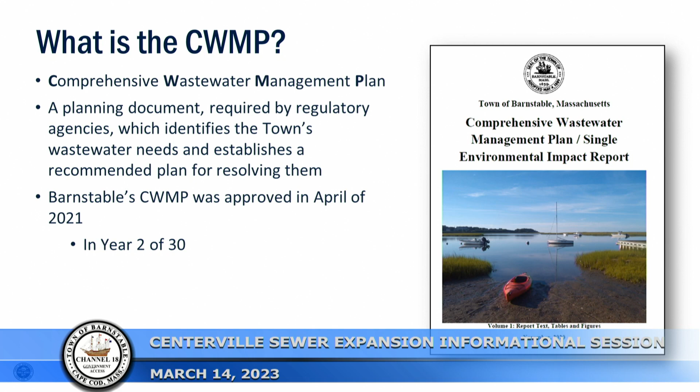What are the general problems that the CWMP is trying to address? Well, the first and largest one is impaired coastal waters, which all of our south-facing embayment systems are impaired by nitrogen. So the key goal here is to try to remove nitrogen from the environment. We'll talk about nitrogen in a minute.

Also, we're trying to address groundwater quality concerns. We sit on top of a sole source aquifer, and that's where we get our drinking water from. So we're trying to find ways to minimize contamination to that important resource.

Pond water quality concern. Everybody is probably aware that we've been seeing decreased water quality in our freshwater ponds in town, including cyanobacteria blooms and other water quality concerns. Many of these actually trace back to wastewater issues as well, so the plan does intend to address some of those concerns.

Flood zones and climate change, making sure that we consider changes in climate and impacts to wastewater infrastructure within those flood zones and areas that will be impacted by climate change.

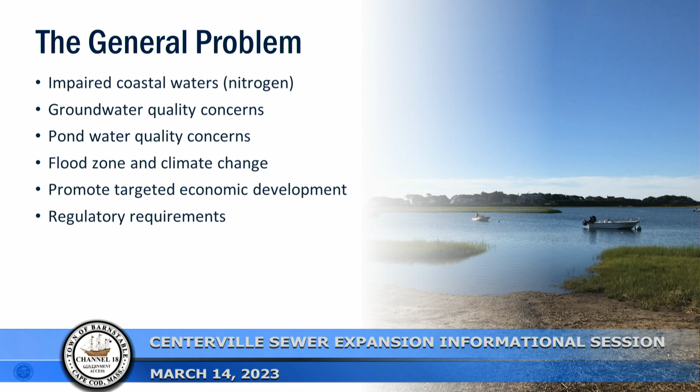And promoting targeted economic development. We worked with our planning staff in the development of the plan to identify locations where Title V is currently restricting growth that may be desired in certain locations—not everywhere, in locations that it makes sense. So that's one of the other goals of the plan.

And then regulatory requirements—the plan is a regulatorily required document.

So just a review of what nitrogen pollution in Barnstable means. Nitrogen pollution has been documented by the Massachusetts Estuary Project, you've probably heard of it, called the MEP. This was a series of reports undertaken by the UMass Dartmouth School of Marine Science and Technology, starting in the 1990s and through the late 2000s.

Really what it did is it studied each coastal embayment system on the Cape, and some of southeastern New England as well. What it found is that Barnstable's coastal waters are impaired by nitrogen. It identified effectively a nitrogen budget for all of these systems, called a total maximum daily load. Under the Clean Water Act, communities are required to achieve these total maximum daily loads and make remediation measures to ensure that we do. That's where the CWMP comes into play.

So this chart here—a little hard to see right now. Where's the laser? There it is. Okay, so you have the big blue pie here on the pie chart. This is showing controllable sources of nitrogen on Cape Cod, from the 208 report done by the Cape Cod Commission in 2015. What it's showing is that about 78% of all the controllable nitrogen that enters the coastal embayments comes from septic systems.

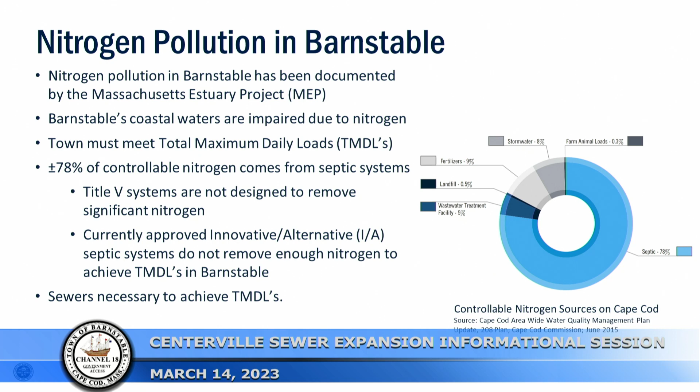So a couple notes on septic systems. Title V septic systems, which is the standard in Massachusetts right now, are really not designed to handle nitrogen. There are innovative alternative septic systems that have been designed to address nitrogen, but the currently approved ones do not remove enough nitrogen to meet TMDLs in Barnstable. As a result, the plan identifies sewer expansion and wastewater treatment as the main way to address the TMDLs in the community.

So what about the do-nothing approach? What's the cost of inaction? Well, the Federal Clean Water Act requires communities to meet the TMDLs, so not doing so could result in an enforcement order, fines, or other negative impacts to the community.

But also, it will result in further damage to the water quality and our important water resources, which inevitably will have a negative impact on the local economy and on property values. Obviously, those are all bad things that we're trying to avoid.

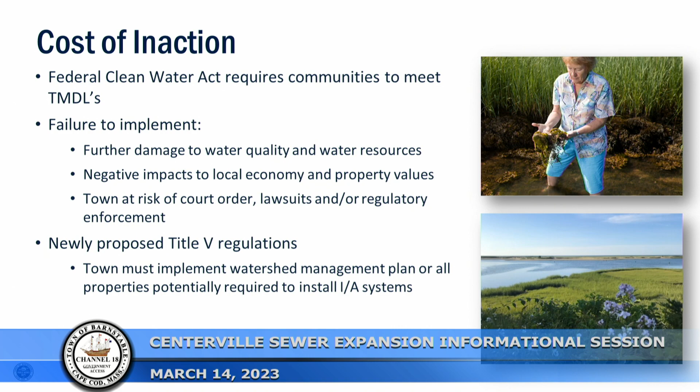In addition, there are newly proposed Title V regulations that some of you may have heard about. Effectively, what that's saying is that if communities don't implement a watershed management plan similar to the comprehensive wastewater management plan, every property located within an impaired watershed will need to install an innovative alternative septic system.

They actually don't even achieve the TMDLs in some of our coastal waterways in Barnstable, so we don't really view that as a good solution. We want to find a solution that addresses the problem in a manner that can be replicated and moved forward.

So what is Barnstable's plan? Barnstable's plan is three 10-year phases of sewer expansion, effectively. About 190 miles of new sewers will be installed in this community through this plan, and a little under 12,000 properties are scheduled to be connected to the sewer system.

Each phase is not one big project. Each phase is broken up into about a dozen or so smaller projects to make them more manageable, so we can coordinate traffic disruption, believe it or not, and make it more easily executed and achievable.

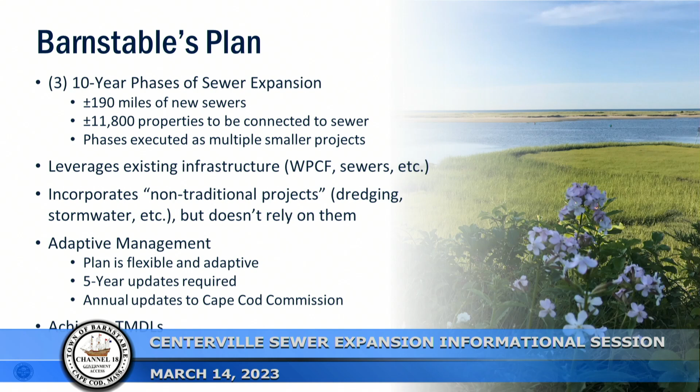It requires adaptive management. The plan has to be flexible, and it has been approved to be flexible. As we worked with regulatory agencies to have the plan permitted, they acknowledged, and we acknowledged, that things are going to change over 30 years. Things have already changed over the first two years.

We have new projects coming in from the outside, new opportunities — such as one we're going to talk about tonight — to expedite certain sections of the sewer system and save money or minimize disruption by sequencing along with a partner, for instance. So it's important that we're able to do that, and our permitting of this plan allows us to.

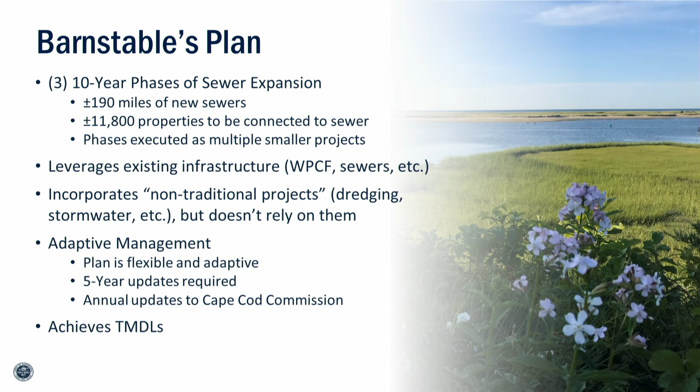We are able to more or less expedite sections of the plan as long as we're achieving the overall goals of the plan. And we are required to provide a five-year update to regulators, which is effectively a look back and a look ahead at what we've accomplished and what we plan to accomplish over the next five years, and any changes.

Each year we have to provide an annual update to the Cape Cod Commission. We've had one so far because we're in year two, and we'll have another coming up in July that we have to submit. You can actually find the annual report on the Barnstable Water Resources website, which documents what we've done to date, what changes we're seeing, and what we're planning moving forward. If you're interested in diving into that, I welcome you to take a look at the website.

This is what the plan looks like. This is what was submitted in November of 2020 and ultimately approved by the regulatory agencies.

So what you have is a bunch of colors over the community. In red are the Phase 1 projects, at 10 years of sewer expansion. In green is Phase 2, 11 to 20 years. Yellow is Phase 3, 21 to 30 years. Then you have some additional colors out in the Cotuit area, which we've called the stages. They don't have a time associated with them yet.

Because at the time the document was being prepared, there were discussions about a potential western solution, and those discussions are still ongoing.

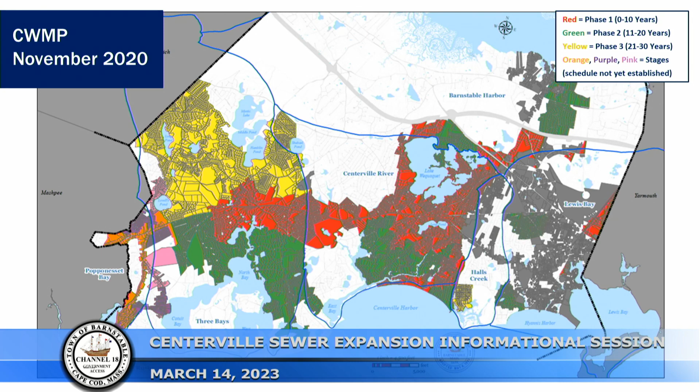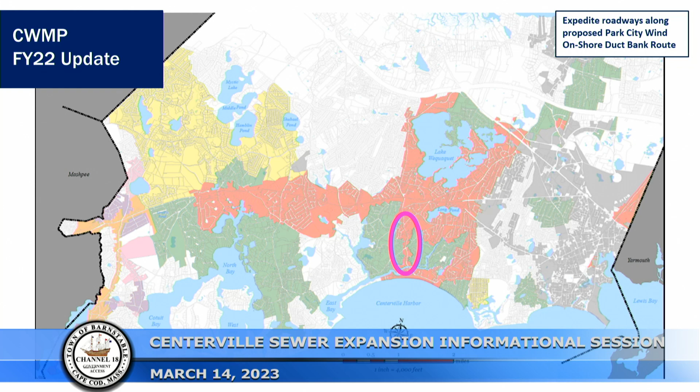So this is the approved plan, and here's a change. It's a little hard to see right now, but this is what you'll see if you look at the annual report to the Cape Cod Commission. There's a circle here, and that's the area we're really focused on tonight, a portion of it anyway. A small portion of the proposed Park City Wind route was originally shown in Phase 2. We'll be expediting it into Phase 1 in order to be able to partner with that project potentially.

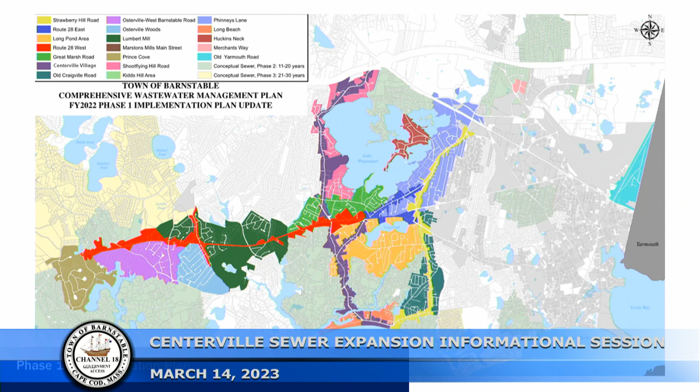What we're really principally going to talk about tonight is this project in purple, the Centerville Village Sewer Expansion, along the Park City Wind route. There are a number of other projects we'll give a quick update on as we continue through Phase 1. We have about 6 to 8 projects currently actively being worked on, in some level of design or implementation and construction. So a lot going on, a lot happening in parallel paths.

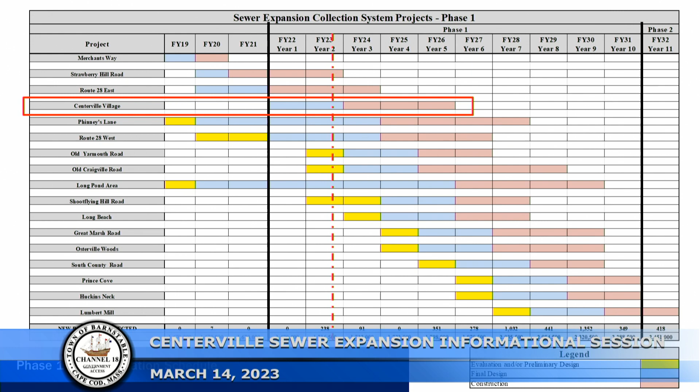This is what it looks like from a schedule perspective. The lighting is kind of killing us here a little bit. There are some blue blocks you're not able to see, but what's important is the red blocks. This vertical line designates where we are today, here in March of 2023. This black line was the beginning of Phase 1, and this side would be year 10, the end of Phase 1.

These are all the various projects that'll be executed during Phase 1. In the red block, we're showing the Centerville Village Sewer Expansion, which is the main one we're going to talk about tonight. Second one down, you see the Strawberry Hill Road project, which was projected to be completed by the end of fiscal year 23, and here we are approaching the end of fiscal year 23, coming to the end of that. So that project is on time, on schedule, and on budget.

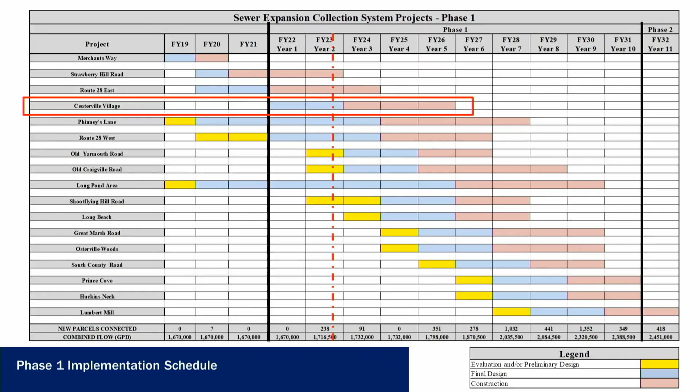There are a number of other projects shown here with various timeframes. You can find this in the annual report as well if you're interested in the schedule of your specific project. We'll go through that a bit more in the next couple of slides.

So the Strawberry Hill Road Sewer Expansion Project, I already alluded to it, but we're winding down on the project at this point. We're, as the graph shows, about 95% complete. In fact, the final stick of gravity sewer pipe went in on March 8th, which was exciting.

We're still working on some of the service laterals that need to be installed along the northerly portion of the project, and then the pump station down at the intersection of Craigville Beach Road and Strawberry Hill Road, scheduled to be completed sometime in April. Then we'll be closing out that construction contract, which will be exciting for all of us over at DPW for sure.

In the fall, we will be coming back to make some adjustments to some of the laterals that were installed in the southern portion of the project. They were designed and installed deep, and for the convenience of residents that live there, we're going to raise them up so they're a little easier to tie into when people hire their contractors to connect. That should help folks save a little money when they come to connect.

So Vineyard Wind construction continues. As you all probably know, this was the project that was coordinated with Vineyard Wind. Their duct bank construction continues.

They're going to be up on Phinney's Lane beginning on the 20th, and they'll be working through Memorial Day on installation of their duct bank in the northerly portion of Phinney's Lane. They will have to pull cable after they install their duct bank. That's probably going to happen in June.

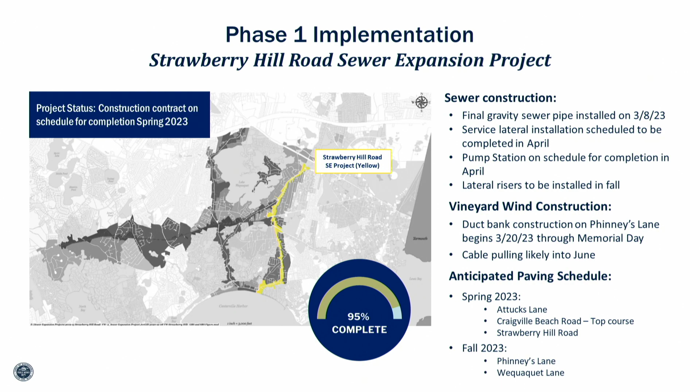So the second project that's currently under construction right now is really two projects from our perspective, but it's really one big project. We manage two construction contracts for it, but it's one big project, and it's called the Route 28 East Sewer Expansion Project.

This is what I call probably the most foundational piece of infrastructure we're going to install as part of the CWMP, other than improvements we make at the wastewater treatment plant.

So what this project is doing right now - and I'm sure you're all very aware of the project - is installing the pump station at the intersection of 28 and Phinney's Lane. That pump station is going to be the piece of infrastructure that will allow for the remainder of the western expansion of sewer that we showed on that map. So everything to the west of that is going to go through that piece of infrastructure moving forward.

In addition, there will be new pipes that come all the way from that piece of property to the wastewater treatment plant, which all that flow will come through. The existing collection system couldn't handle it, so we needed to build a new pipe.

Also as part of the project, and you're seeing this right now, is the southerly portion of Phinney's Lane that's north of 28. So there's digging going on kind of on Phinney's Lane north of that pump station site. That's part of this effort, actually - it's separate from the other construction that's ongoing.

They're going to be continuing that effort till about April. They're going to stop, and they'll be back on Phinney's in the fall, but they're going to be transitioning to Route 28 in April to start some sewer construction effectively from that pump station to about West Main Street.

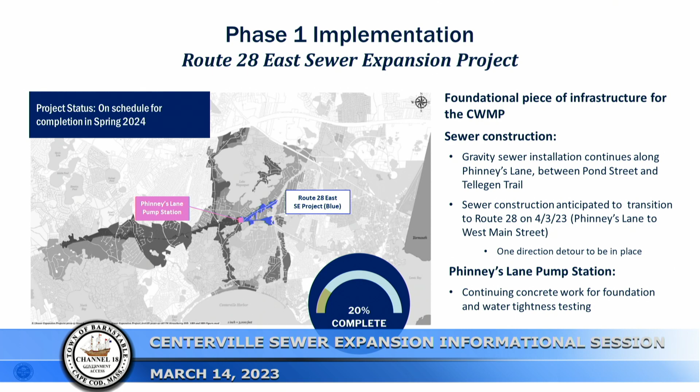And then we will be back in the fall to continue the force mains to the wastewater treatment plant, which will not be as disruptive as the work we're going to be doing here over the next couple of 6 to 8 weeks, as we have to install some gravity sewer in Route 28, which is deeper and more complicated work. But this was all obviously anticipated as part of this program.

There will be a one-direction detour in place, so westbound traffic on 28 will remain on 28. Eastbound traffic will be detoured down West Main Street during the construction hours during this time.

So it will certainly - there will be delays. We're already seeing delays. We will be seeing additional delays on that section of roadway during this time. Fortunately, they'll be starting after or before the beginning of schools, so we won't be delaying kids getting to school too much. But the construction will be going from about 8:30 to 5 on any particular day.

In addition to this project, we talked about the Phinney's Lane pump station. Right now they're continuing to pour the concrete for the foundation, and I got some pictures of that, which you'll see in a second.

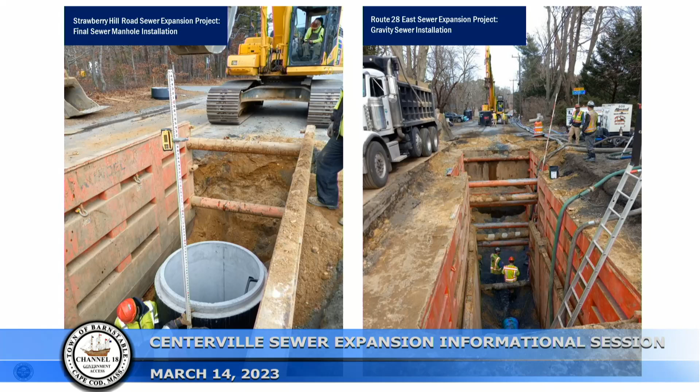So this is some of the sewer construction that has been ongoing. On the left is actually the final manhole being installed as part of the Strawberry Hill Road project. As I was saying, that's coming to an end - that was the last manhole being installed. On the right is the gravity sewer installation happening on the southern portion of Phinney's Lane as part of the Route 28 East project, kind of around near that pump station. You'll see the difference in the two pictures.

The last manhole we put in on Strawberry Hill Road was about 10 feet deep. On the right-hand side, we're about 20-ish feet deep. So that's why you have the roadway closed, and you can see some pipes on the side. We're actually down in groundwater, so we need to pump the hole dry in order to make sure it's a safe environment for the workers, and so we can have some stable bedding to install the pipe and everything.

So some complicated construction ongoing in the community right now.

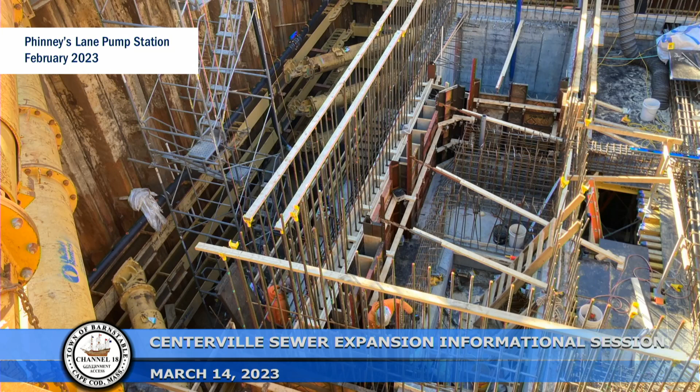This is the pump station, as it looks back in February. So you saw the big crane - there was a reason for it. We dug a big hole, poured a bunch of concrete, built a bunch of rebar. We're coming up with that now over the course of the next month or so. We should be wrapping up the foundation work, which will be great, and then we'll start actually seeing a building going up here over the course of the spring and into the summer. Just wanted to show this picture to show what all the construction over there was all about.

One of the next planning projects we're currently working on is the Route 28 West sewer expansion. So we had the Route 28 East sewer expansion - this is the next section of work in Route 28. Route 28 is really the backbone of the planned system. It allows us to get out west because it's the main roadway right down the center of town. This project will extend sewer from Phinney's Lane all the way to 149. We awarded the design contract late last year - design's ongoing, and we're expecting construction to start in 2025.

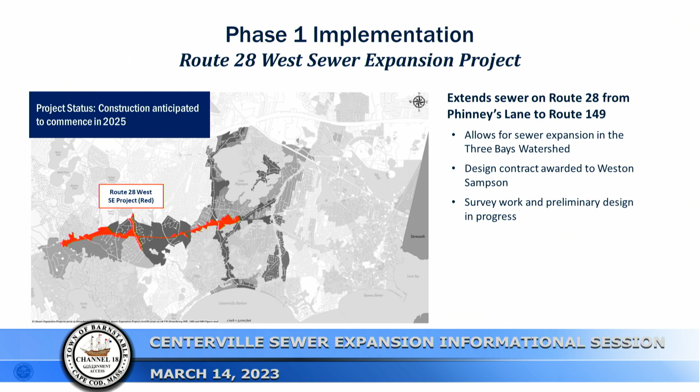The next step after that is a whole number of neighborhood projects. We're doing a lot of the main roads right now, kind of have to do that first, and then we're going to start getting into neighborhoods. The first of which is the Phinney's Lane sewer expansion project, shown in light purple, right in this area - the neighborhoods on either side of Phinney's Lane, north of 28, between 28 and 132. So we'll be extending sewer into those neighborhoods as part of that project. The survey is complete, we've done some internal design, we have a design staff at DPW doing the preliminary design, and we'll be hiring a consultant to finalize the design over the course of the next year, expecting construction to start in 2025.

In orange is the Long Pond area sewer expansion project - this is the area around Long Pond, Centerville. Again, a neighborhood project, getting into all the neighborhoods off of Pine Street and Main Street in that area, South Main Street, and starting to collect flow from the neighborhoods. This is where we start to actually see the nitrogen reduction significantly, because that's where the nitrogen's coming from - your septic systems. When we're putting in infrastructure on the main roads, it's not as dense - there's not as many homes per foot. But once we start getting into neighborhoods, that's where we start collecting more nitrogen and making a significant dip into that. Long Pond area construction is anticipated to start in 2027.

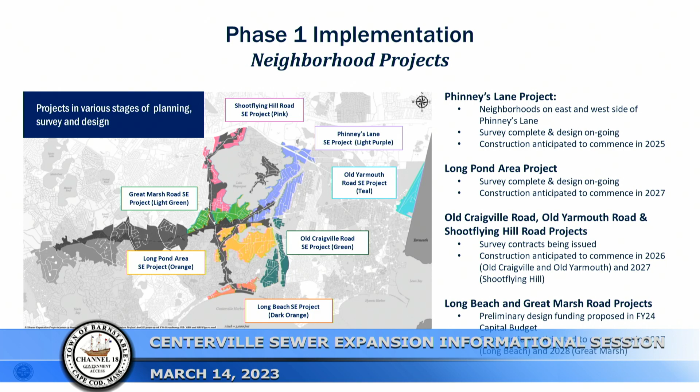Old Craigville Road is down in this area - effectively the neighborhoods on either side of Strawberry Hill Road, from Pine Street to Craigville Beach Road. Old Craigville Road runs diagonally through that, so we chose that name. Similar to the other two projects, neighborhoods down in that area, with construction anticipated to start in 2026. Old Yarmouth Road is the kind of triangle formed by Yarmouth Road, Route 28, and the Yarmouth Town Line.

That's the commercial area with the car dealerships and everything else going on up there. Sewer expansion is expected to start up there after the intersection improvement project stops, so that we're not in conflict with DOT's work that's ongoing there now.

That's principally going to be in the back roads. A little bit will happen on Yarmouth Road, but it's principally going to be back in Old Yarmouth Road and Rosary Lane back there. That's scheduled to start in 2026.

Shootflying Hill Road sewer expansion is the pink neighborhood roads on either side of Shootflying Hill Road. Actually, Shootflying Hill Road will be in the project we're talking about tonight, but the neighborhoods will be what's been called the Shootflying Hill Road project.

That, again, is 2027. Two more projects that are kind of active in-house: the Long Beach sewer expansion project. So Long Beach sewer expansion actually includes quite a bit more than just Long Beach. It includes Short Beach and the Lake Elizabeth area, so that'll be expansion into those areas.

The design funds for that are scheduled to be included in this upcoming year's capital budget, and we expect construction to start in 2027.

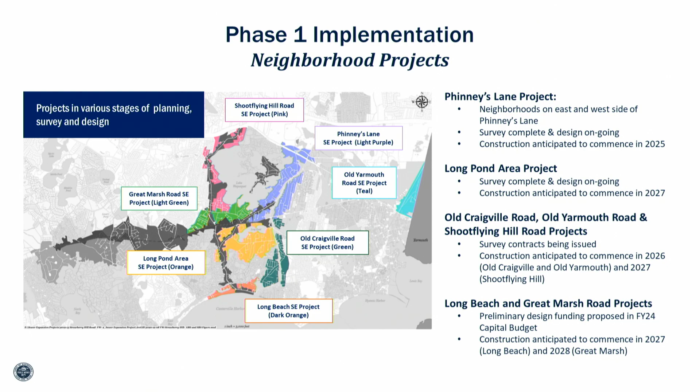Last project before we get into the main project for tonight is the Great Marsh Road sewer expansion project, which is here in green, right there. Again, neighborhoods on either side of Great Marsh Road, scheduled to start in 2028.

So that brings us to the Centerville Village Sewer Expansion Project, which again is really what we're here to talk about tonight. This is the route along the preferred upland duct bank route of the Park City Wind project. It's about 5 miles of new sewers.

We're anticipating about 6 new sewer pump stations are necessary along this route, as it's a 5-mile long route with a number of low points and things along the route. About 350 new properties are along the route that will connect to it once we are completed.

The design is being coordinated with the Park City Wind design. That's out of necessity, as I alluded to earlier. We're operating under the assumption that that project will be happening, and we need to make sure a corridor is maintained for the duct bank to be installed and for us to get a sewer in the ground in these roadways prior to that duct bank going in.

We're anticipating at this time construction to be sequenced with Park City Wind, and we'll talk about what that would look like if that's to happen. Every indication I have at this point is that's what we still will be doing. But obviously, as I talked about earlier, there are some questions up in the air there. I'm not going to get into that too much, but we're planning, forging ahead with the assumption that construction will be happening in conjunction with them.

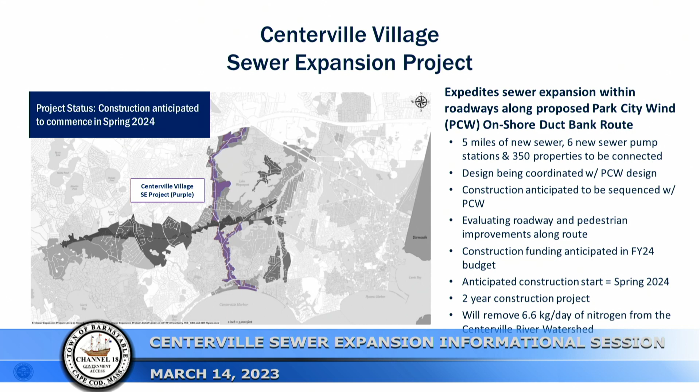So I'm going to review the route just real quick. What I've done is taken the last map and just kind of turned it 90 degrees, so north is on the right side of the figure here. On the left side is Craigville Beach and Craigville Beach Road.

The sewer expansion is actually going to start at Covell's Beach, because as part of the Strawberry Hill project we stopped at Covell's Beach and we need to pick up those pipes and bring them to a pump station that'll be located along Craigville Beach Road. So the sewer expansion will be all of Craigville Beach Road from Covell's Beach to South Main.

It will include Main Street. So this would be the historic Main Street here, and then the spur of Main Street up to Phinney's Lane and North Main Street, with Mother's Park being right in this location. Route 28 would be right about here on this plan.

And again, I'm sorry it's a little dim with the lighting we have here. It's going to take the turn up Old Stage, cross Route 28 there, and then it will take a right onto Shootflying Hill Road and go all the way up Shootflying Hill Road to the service road. That is the Park City Wind route that is proposed at this time.

In addition, there's a little spur right here, at the intersection of Main Street and Old Stage. This would be that stretch of Main Street that turns into Phinney's Lane, Route 28, that goes right past Mother's Park. The reason we need to do that is because this portion can't function without infrastructure being installed on that roadway, because we need to install a sewer pump station in the area of Mother's Park to make that all function. We'll talk about that a little more in a bit, but that's why that spur is part of the project. It's really not part of the Park City Wind project, but it has to be installed for the sewer infrastructure to be effective.

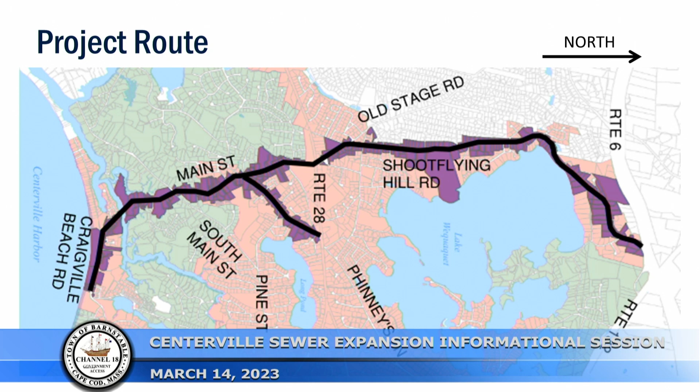So let's talk about some construction impacts for a minute. We're all starting to see what the sewer expansion program looks like, what these construction projects look like, so we'll go over that here. The assumption in this slide is that this is coordinated with Park City Wind too, so there's some discussion about what a duct bank construction would look like.

Both the sewer and duct bank construction are pretty significant infrastructure projects. The sewers require deep excavations, 10 to 15 feet deep, at times down below 20 feet deep, which requires significant trench boxes, big equipment, et cetera. The duct bank construction is significant too. They're installing pretty wide duct banks, a lot of concrete, a lot of pipe. They're a little shallower, but they're complicated construction.

They also have to install vaults along their route about every 1,500 feet or so. Vaults are massive, about 9 feet wide and 30 feet long, about 9 feet deep. They bring a crane in to place the vault, and you may or may not have seen that along the Vineyard Wind route. That's similar to what would need to happen along the Park City Wind route, strategically placed every 1,500 linear feet, but part of the project.

With the multiple efforts comes multiple contractors that have to be coordinated, including coordinated road closures. This construction is really not safe for cars to be driving by, it's deep, it's wide, there's a lot of equipment. We really need to lock down the work zone to make sure the public's safe. That requires coordinated road closures including police details, and when there's not enough police details, we supplement them with certified flaggers for roadway flagging, plus signage and press releases to try to make sure everybody's aware of what detour is being used at that time.

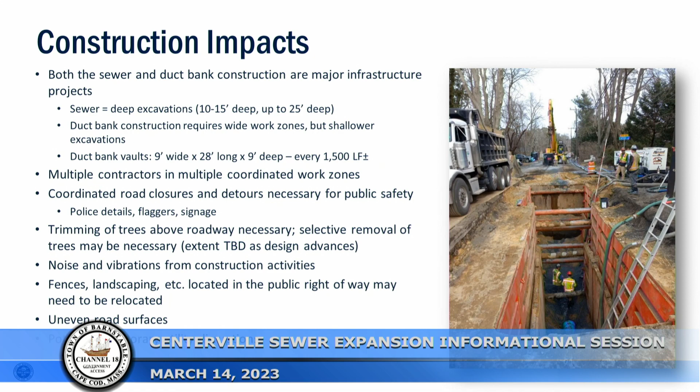With construction comes noise and vibrations, and we look to manage those to the extent possible. Fences and landscaping located within the public way do need to be relocated at times, so we come out and mark the public way, and then have those conversations with residents if we need to. And obviously, while we're in the temporary paving time frame before final restoration, you'll see some uneven roads.

It doesn't really happen all that often, or hasn't, knock on wood, but there's a potential for temporary utility disruptions, particularly water or gas, if a utility's hit during the excavation, or if a utility needs to be relocated.

So how are some of these impacts mitigated? Our regular work hours are 7 a.m. to 3:30 p.m. That's not just for the sewer project, that's really any construction project within the roadways in the town of Barnstable. We do authorize extended hours when it's advantageous, so if it's going to allow for some additional work to happen or work to happen quicker, we'll take that under advisement and make that call.

No work is allowed between Memorial Day and Labor Day. However, similar to the extended hours, we do consider that at certain times. If we're two weeks worth of work away and then we don't need to come back to an area, we're probably just going to try to wrap things up rather than come back in the fall and start disrupting everybody in that area again. So it's a case-by-case basis, but the starting point is Memorial Day to Labor Day, we try to stay out of the roadways.

We strive to have close project coordination with the wind developer. We coordinate our schedules, lay down areas, work zones, trucking routes, detours, everything. Constantly talking with them and their contractors in order to make sure that we both know where everybody is and we can coordinate things to minimize disruption and expedite work.

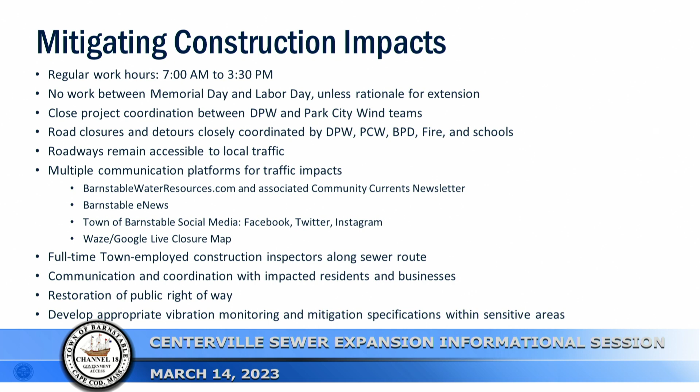We have full-time town-employed construction inspectors along the sewer route. At each of the holes that we have open during the sewer construction project, we have one of our inspectors there so that we can talk to the residents that are near the hole and help them navigate any issues that they may have. Hey, I need to get out of my house and get to work, and you happen to be in front of my driveway. Okay, let's try to find a way to make that work, right?

Or, hey, I'm going to be back from work at 3 o'clock today, and then I'm going to need to head back out. Can we... Got it. We'll make sure we're waiting for you, and we have a way to get you in and out to the extent possible. Sometimes it's not practical to do that, but to the extent we can, we try to make those accommodations.

And then restoration of the public right-of-way at the end. We have a new road at the end of the project, which is nice. And with this particular project, we are going to be developing some detailed vibration monitoring and mitigation specifications within sensitive areas, really the historic district and any areas where there's some older homes that we might be concerned about impacts of vibration or anything like that. So we are working on that, and we'll continue to implement best measures to address that concern.

So coordinating and sequencing construction with Park City Wind. I'll go through this pretty quick, but I want to address maybe some misnomers with the previous project, which was the Strawberry Hill and Vineyard Wind project, and that's that all the utilities go in the ground at the same time. That's not what happens, and they don't go in the same hole. They're being installed in different utility corridors, so a trench here, and that's being done for a number of reasons.

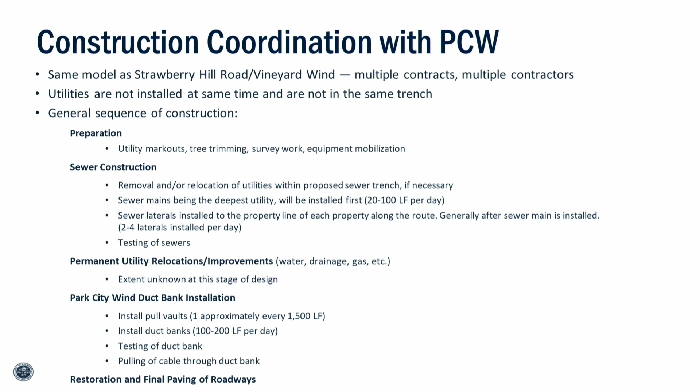After that point, at least on the Vineyard Wind project, and the way we would expect the Centerville project in coordination with Park City Wind would be, any utility relocations that need to happen would then occur, and they would most likely be done by the wind developer. So once we're done with the sewer construction, we'll be on to the next portion of the work, and the wind developer would come in that particular case, start the utility relocations, and then start their duct bank work. The duct bank work would be in a separate utility corridor installed.

Then they have to test the duct bank and pull the cable. Once all that occurs, we repave the roads and we're done. That happens over a sequence of months. We try to coordinate them as close as possible so they occur within the same construction window, or two simultaneous construction windows, to mitigate the amount of time we're in front of any particular property.

The first step is preparation: utility mark out, tree trimming. This is an example of tree trimming along the Strawberry Hill project, where the sewer construction was going to happen. Some limbs were a little too low to get the equipment in, so we had to trim the trees above where that work was going to happen, not horizontally, but above.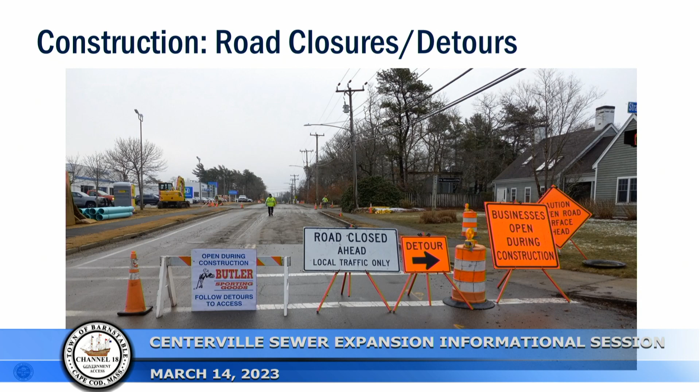Sewer excavation - this is what it looks like. We're digging a hole in the roadway, putting a trench box in, and laying pipe in the hole. That's a simple way to look at it, but you see big equipment and a mess during construction. Well, that's what it looks like.

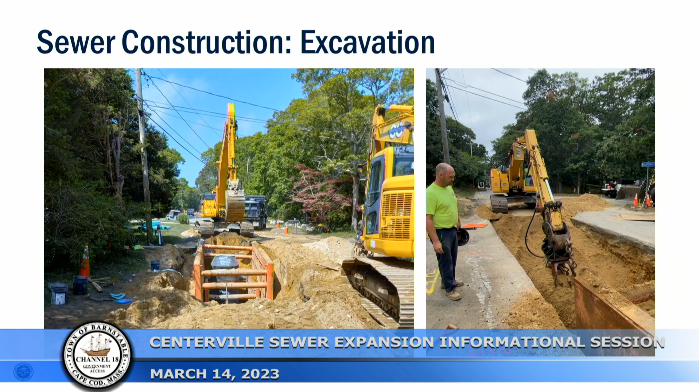Then at the end of the day, on the right side of the screen, we're backfilling the trench, so you start to see the roadway get a little cleaner as the work day winds down. We temporarily pave at the end of the week - we leave it with stone until Friday, and pave once a week all the trenches installed that particular day. So on the right side is what you see at the end of each week.

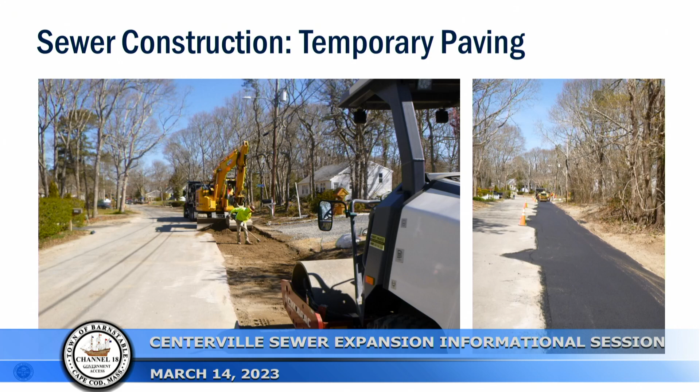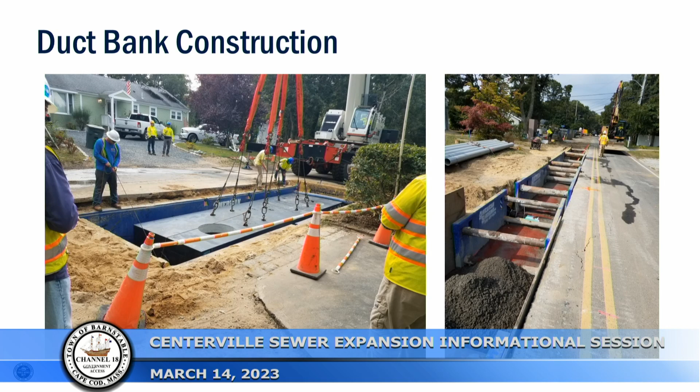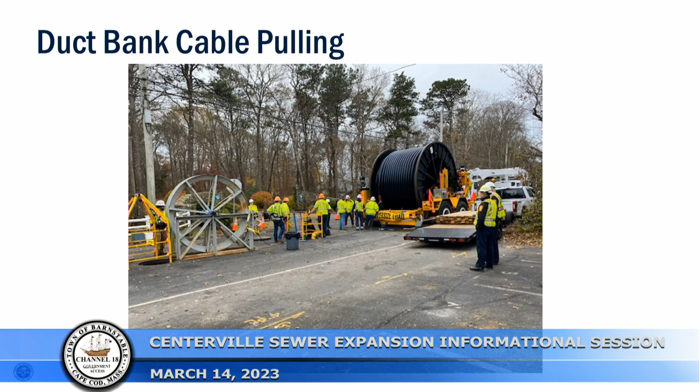Duct bank construction looks like this. The vaults I was referring to are these here - you see a crane set up on the roadway to install this large vault into the excavation. This on the right is what a duct bank looks like: a series of pipes that they pull the cables through, encased in concrete, with trench boxes supporting the excavation during construction. Then they come in with large cable reels and pull the cables through the duct banks, and at the end of the day you have a final paved road.

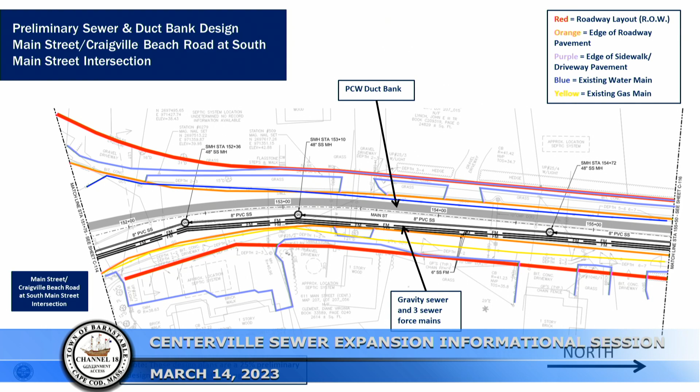Another section of the roadway here near the Centerville Recreation Building. Again, in red is the edge of the roadway, and orange is the edge of pavement. Sewer would be on the northbound side, within the northbound lane. The duct bank would be on the southbound lane.

In this case, the water is a little bit further separated, which may result in being able to retain that water main. However, there are some discussions about the fact that the water main is old and may need to be upgraded anyway. Those conversations are ongoing and there hasn't been a decision made. I know COMM Water is having conversations with the wind developer about that issue.

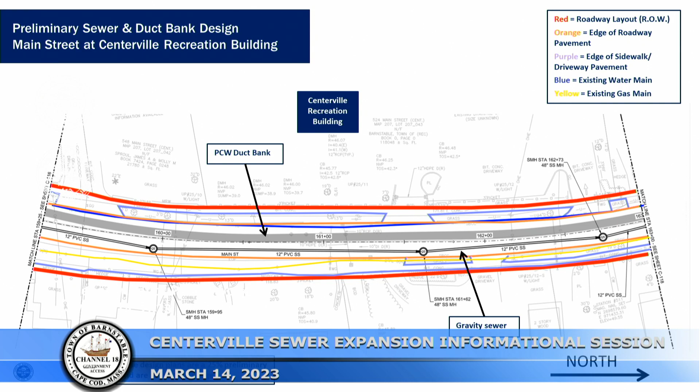All right, so going to quickly go through the anticipated sewer pump station locations along the route, and then we'll have an update on Mother's Park, which is one of the six sewer pump stations along the route. I've listed the locations of the proposed sewer pump stations, and you can see them graphically on the left side of the screen approximately.

So we have one proposed at Craigville Beach in the parking lot. We have one proposed within the town right of way just north of the Centerville River Bridge, and I'll show a picture of where that is. We have one that's going to be necessary along Old Stage Road at a low point.

We do not have the location identified yet, as there's no town property in the location, so we're in the process of trying to figure out where we're going to site that infrastructure. If we're not able to site it, folks may need to have grinder pumps in that area, so we're trying to avoid that. The fourth pump station would be the one in the area of Mother's Park.

There's a fifth pump station along Shootflying Hill Road. Same deal as number three, we're in the process of trying to figure out where that's going to go. We're still vetting that. And then pump station six serves the northerly portion of the project. There's a town-owned piece of property at 467 Shootflying Hill Road that we're looking to site that piece of infrastructure on.

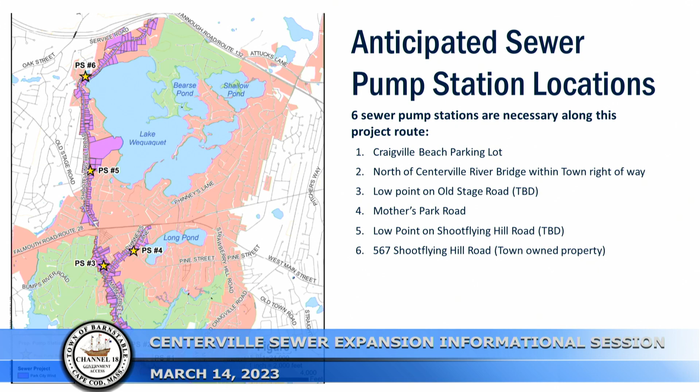Quick reminder of how a sewer system works before we start talking about pump stations. So we try to leverage gravity sewer when we install sewer collection systems to the extent possible. So here's you at your house. Your plumbing drains out, and right now it goes to a septic system, right? It will be intercepted and installed to connect to this public sewer main that'll be installed under the roadway, which I just showed in the other pictures.

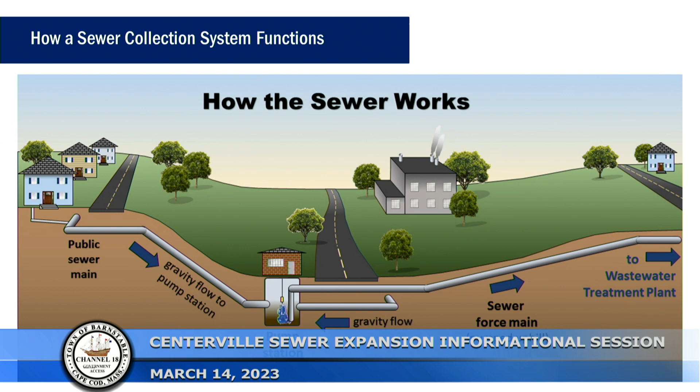Those all have slope to them, and they slope to a low point where we collect the sewage flowing through them into what's called a pump station. That is basically an underground tank where all this wastewater collects, with pumps that then take the wastewater and pump it through what's called a sewer force main, which is effectively just a pipe under pressure, to the point at which we're looking to pump it. Many times it's a wastewater treatment plant, and other times it can be other portions of the sewer collection system that go to another pump station, and we have a daisy chain of pump stations before we get there.

So just a quick reminder as to what that is and how we operate pump stations. When we have a pump station, we are required to visit it once a day. That looks like basically a pickup truck coming to the facility and doing a visual inspection of the key infrastructure. It's required by DEP, and it's good practice to make sure the infrastructure is working well.

We also have all the stations remotely monitored, so our operators at the wastewater plant, if something goes wrong or there's an alarm, will get a text message, and then they'll send somebody out to go maintain the station. Periodic maintenance does occur if something's at the end of its useful life or failing, but that's not very frequent.

Generators are installed at most of these stations. They are exercised once a week for 15 minutes, so you do hear the generator run. That's similar to what you would have with a generator at your house. You want to keep them working well and make sure they're being operated, because that's the best way to maintain them.

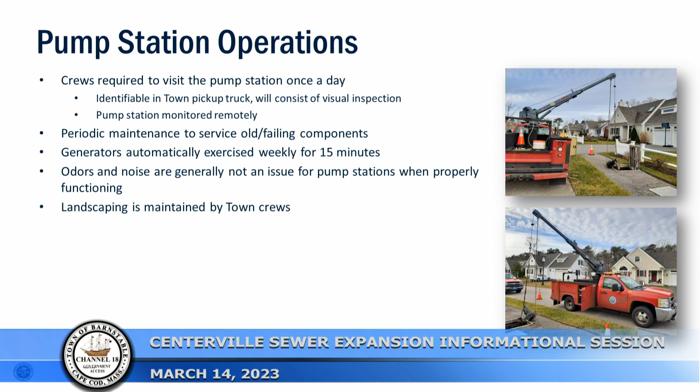Odors and noise are generally not an issue for pump stations when they're functioning properly. If we start smelling them, there's something wrong and we have to fix it. Generally the sewage is contained below grade, so you don't notice it unless something goes wrong, which fortunately doesn't happen often with this type of infrastructure. Landscaping at these sites is maintained by town crews.

So then we're getting into the actual pump station sites. I talked about Craigville Beach earlier, about the fact that we need to connect the pipe that we left for the Strawberry Hill Road project near Covell's Beach to a low point. That low point's going to be Craigville Beach, or the area of Craigville Beach.

We're proposing it to be at the Craigville Beach parking lot. There's a star shown right here in the northerly portion of the parking lot. That would be a submersible pump station, which is a below-grade pump station where the wastewater would come in and the pumps would be.

We also show this square next to the existing bathhouse. The reason for that is the electrical infrastructure has to be above the flood elevation for climate resiliency, and regulatorily we're required to put that infrastructure above a flood elevation, because if it floods, it fails. There's no point in having a sewer system at that point, right?

So on the next sheet I'll show you what the concept is for that structure. We're trying to leverage the bathhouse to make it less visually impactful, but we can't put it on the bathhouse because the bathhouse actually isn't designed to withstand a flood either.

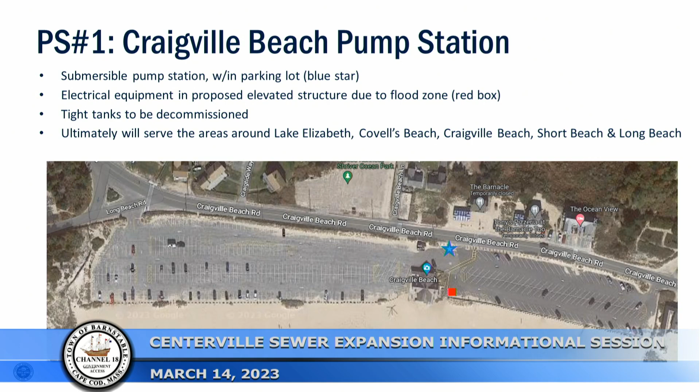So this is our concept for what that could look like. What we have here is, if you're sitting on the beach looking at the bathhouse -- this is the existing bathhouse, and on the right side, one concept is the idea of a clock tower.

This would be a structure where the bottom, in a flooding event, would basically have breakaway panels, and you would just have a structure that remains during a flooding event. Above it would be an enclosed structure that would have all the electrical equipment in it and would be able to survive a flooding event. It would be designed for climate change.

It's required to be 3 feet above the flood elevation. In this area, that's about 15 feet off the ground. Believe it or not.

Ultimately, the top of a proposed structure there would be roughly the top of the existing bathhouse as far as the ridge. It's relatively small in footprint, about 10 by 10. So not a huge structure, but certainly would be noticeable in the area.

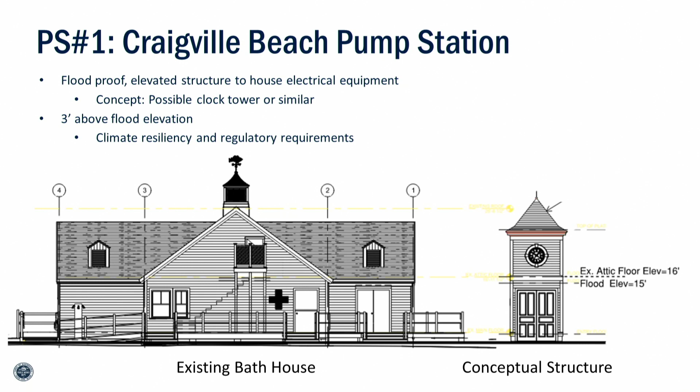Would certainly be interested in ideas or feedback on the idea of a clock tower. That was just an idea that we came up with, trying to make something useful, as opposed to just a structure next to the bathhouse where everyone's saying, what the heck is that thing doing there? So we tried to find a reason to make it useful. Some other ideas we've had are a lighthouse or something like that. But at the end of the day, we were trying to avoid just a big ugly steel structure with a bunch of electrical equipment on it.

Wanted to go through that. Second site, as I alluded to, is just north of the Centerville River Bridge. On the right side, you can see a little star right there. Here's the Centerville River Bridge.

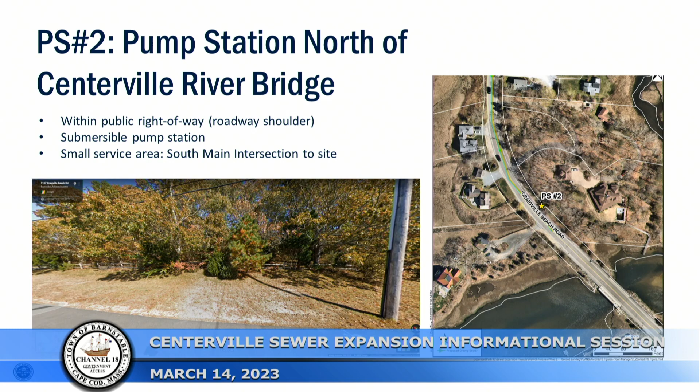There's a big open area of the town, public-owned right-of-way, that is a cleared shoulder here. So we would propose to install a sewer pump station there. It serves a very small area, really just from the South Main intersection south to here, so only a couple dozen homes would be served by it. But we try to install a municipal solution as opposed to requiring all those homes to have a grinder pump on them.

So in this case we were able to do that, and that's one location we're looking to install this infrastructure. I talked about the northerlymost pump station, which was 567 Shootflying Hill Road. Again, that's a town-owned piece of infrastructure, town-owned parcel. Just to orient you, the Lake Wequaquet boat ramp would be 1,000 to 1,500 feet north of here.

In the back of this property is a wetland, so we have to be smart about how we design this piece of infrastructure, because we need to try, to the extent possible, to minimize wetland impacts and stay out of buffer zones to wetlands, et cetera. So we're in the process of designing this station.

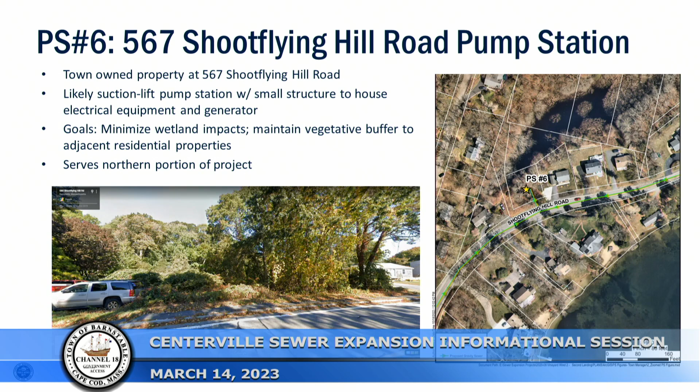We expect it to be a small structure so that we can house some of the equipment within it, and really try to blend it into the residential area, probably have it look like an adjacent residential property rather than just a big cleared area. The goal is to minimize the wetland impact and maintain a vegetation buffer to the adjacent residential areas. It serves the whole northerly portion of that map we talked about earlier, so it's an important piece of infrastructure we have to install.

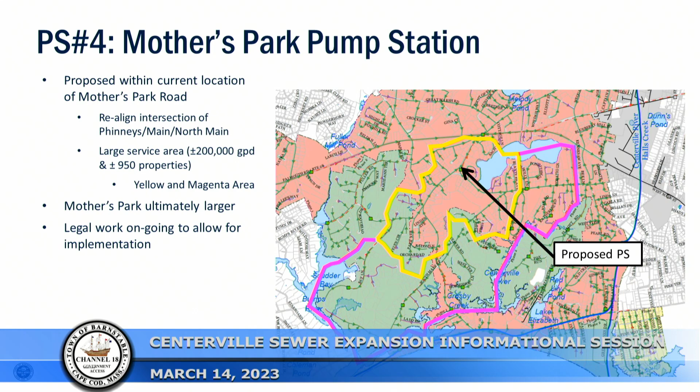It's going to serve about 200,000 gallons per day, about 950 properties. It's an important piece of infrastructure for the build out of this area. It's currently proposed within the current location of Mothers Park Road, which I'll show on a map in a second, and it would require the realignment of the intersection of Phinney's at North Main in order to get rid of Mothers Park Road. Mothers Park at the end of the day would ultimately be larger, which is a great outcome, and we're continuing with the legal work associated with allowing this effort to happen.

So this is Mothers Park, we're all pretty familiar with it. On the right side of the screen is Mothers Park Road, the narrow cut-through roadway that at times can be pretty dangerous if people are speeding and flying right through there without a care in the world. Really the reason why that's there is because the intersection of North Main and Main is pretty poor geometry, at a 45-degree angle. It's not how you design an intersection; you want a 90-degree intersection. So in order to remove Mothers Park Road, we're going to need to realign this intersection down here.

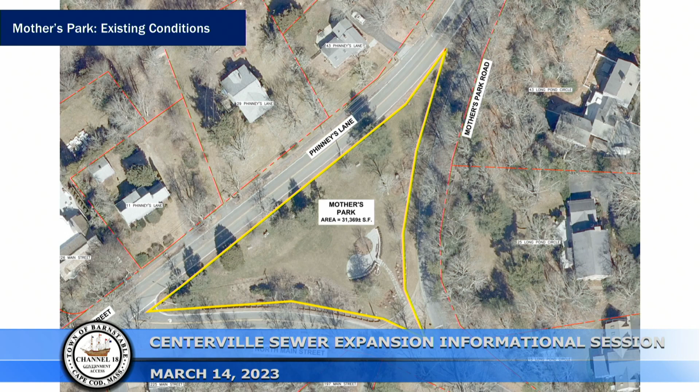So what does that look like? This is what it looks like. The old intersection would be here; it would be in this location at the end of the project. In addition, we would install a crosswalk with a new sidewalk that makes this connection. Along North Main, there's a sidewalk on the south side, so we have a full connection from Main Street to North Main, allowing people to utilize Mothers Park a little more.

In addition, there's really no parking there, and no ADA parking, which is important. So we're going to add an ADA accessible parking space and a gravel parking area so people can actually park there. And this portion of what formerly was Mothers Park Road will become part of Mothers Park. We'll take out the pavement and landscape it however the community desires, to the extent reasonable, and that will be a larger park at the end of the day. When you do the math of the two areas that have to be removed for the intersection and what gets added, it's about 3,500 square feet larger at the end of the day.

So it's a slightly larger site. Why are we talking about it during a sewer project? Well, here's the pump station that would be installed in what was formerly Mothers Park Road. We would leave just a driveway access to that station. This property, 43 Long Pond Circle, has a driveway off Mothers Park, so we'd leave access to their driveway as part of that, but it wouldn't be a through road anymore at the end of the day. It would be signed as such. So a sewer infrastructure improvement, but also really a traffic improvement and a safety improvement to those roadways. Good little project that takes advantage of a couple of issues that need to be addressed.

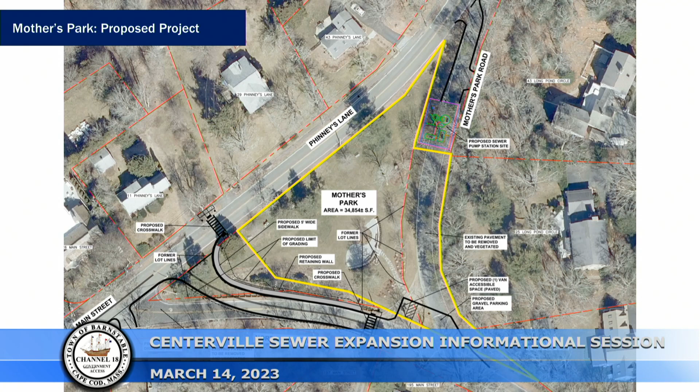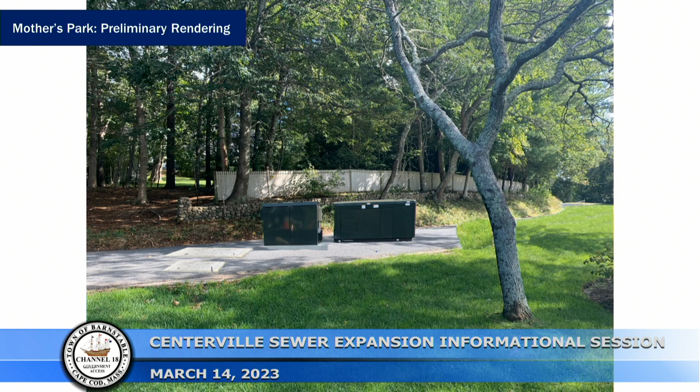So what will the pump station look like? This is the area that the pump station would go in. It would roughly look like this. These are the hatches, and these are what the electrical panels and the generator roughly will look like. In many of these cases, we put fences around them, so we likely will put a fence around it in this location. Just wanted to show what a preliminary rendering would look like.

Driving down Phinney's Lane, heading towards Main Street, this is what you see on the left side here, and this is what you would see afterwards if there was nothing else done. There's the option of putting some landscaping in Mothers Park to kind of screen that and dress it up a little bit, or we could do a fence or something like that. That's something we'll have conversations about down the line, but really what the concept is here for this project.

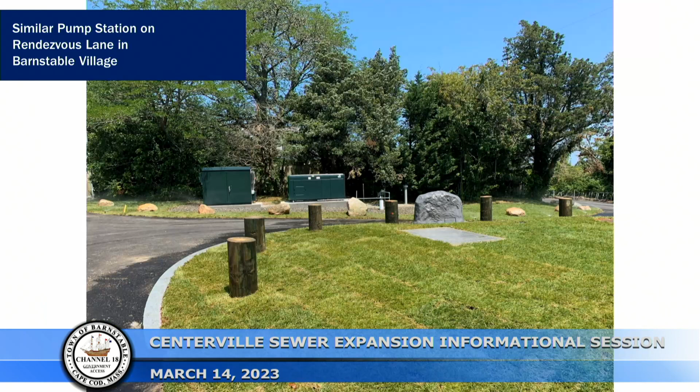This is a similar project we did up in Barnstable Village on Rendezvous Lane. There was a pump station at the end of Rendezvous Lane that anytime we had a nor'easter would literally get flooded with water, and we would wrap saran wrap around it to try to keep it watertight. It was ridiculous. So we decided to move it up and away from the water, 3 feet above the flood elevation to account for climate change. But that required putting the pump station in the middle of, if you've been down Rendezvous Lane, there's a little nice island there. We had some conversations with the neighborhood — I actually held that neighborhood meeting in somebody's garage and talked about what that was going to look like.

We landed on the electrical equipment being sited in this location. We ultimately put a fence around it, which isn't shown here — a nice stockade fence around that now. And just outside of the screen is a landscaped area we came in with our structures and grounds department to dress up the island at the end of the day. That's really what we're looking to do at Mothers Park, similar — you really don't see the infrastructure when you drive by. It's really just a hatch in the middle of the island at the end of the day.

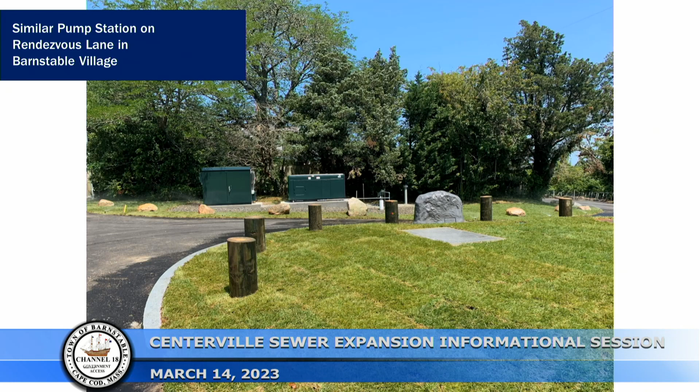So progress to date on this: like I said early on, we had a conversation with the village back in December of 2021 about this project. Since then, we've continued to design and refine the concept design. If you remember back in December of 2021, it looked a little different than what I just showed you, but same general concept.

Mothers Park Road was technically a county road, so we needed the county to make a vote to rescind their rights to the road. They have since done that, and it's now a town road. We'll need to have some action through the town council to discontinue the roadway in order to actually use it for the uses we're going to use.

Mothers Park, however, is protected Article 97 property, as it's a dedicated park. So that requires going to a petition to the legislature in order to change the use of the portion we're going to utilize for realigning that intersection. That's something that will be happening over the next couple of months — at least the application will be happening over the next couple of months.

In addition, we do need to go to probate court because the piece of land was left in a will that's over 100 years old, and it needs to be modified. We have to go to probate court in order for them to allow for that to happen.

So these are actions that are ongoing. When I refer to legal actions that need to happen, this is what I'm talking about. They're ongoing, legal teams on this, and all these items need to happen before we can start construction. And until that happens and construction is underway and coming close to the end, the recommendation we've received is to hold on to 310 Main Street, so that if there's any appeal or anything like that, we're able to have a backup plan, which hopefully we don't have to utilize.

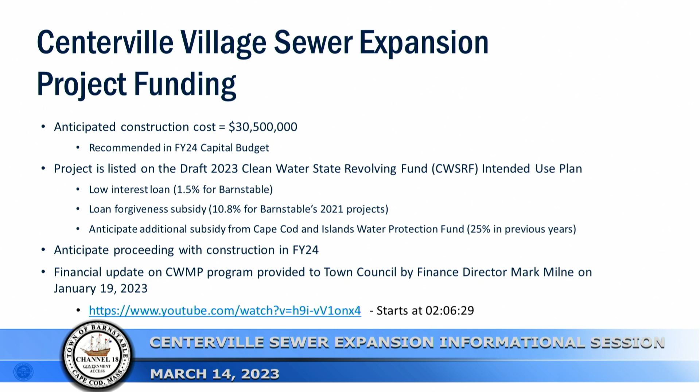And then in addition, on Cape Cod we have the Cape Cod and Islands Water Protection Fund, which issues subsidies to communities that have projects on this list. That's how they've decided to issue these subsidies. Again, in 2021 they issued 25% subsidies to projects. With this project, that would be huge. I'm not sure they'll have that amount of money in the upcoming year, but we anticipate a subsidy through that fund as well.

So there are a number of funding sources that will offset some of the cost of this, but not all. It is anticipated to proceed with construction in fiscal year 24.

One thing I'll note: Finance Director Mark Milne provided an update on the financial plan for the whole comprehensive wastewater management plan, not just this project, on January 19th to the town council. I've provided the link there—you can go on the town's website and navigate to that meeting. It provides good information as to the financial status of the program and what will need to happen moving forward to keep the program viable. Important to understand that. I'm not going to get in the weeds of it because I'm an engineer, but just wanted to point everybody in the direction to get that information.

And then what's the anticipated schedule? The votes for capital projects typically happen in the April timeframe in Barnstable, so we expect the vote from the town council to authorize construction funds around that time. A deadline for us is to have the design to about the 90% stage for submission of our loan commitment application to the SRF program in October. That's a hard deadline we have to hit—that's with every project, frankly.

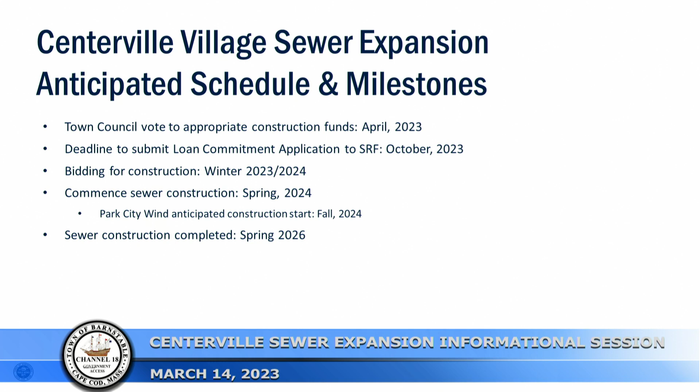All right, so project contacts. As you all know me at this point, I'm Griffin Bowden, the town engineer. There's my information—my cards are over there on either side at the sign-in sheets. We did have sign-in sheets, I didn't mention that at the beginning. If you're interested in getting emails of project updates, please add your name to the list. We'll develop a project list.

We are going to open a public comment period on anything you heard about today. In addition, this public comment period will run through the meeting we have scheduled on April 4th about the Main Street corridor improvements. So that's going to be open through April 30th, and you can email Kelly and submit that public comment—her email's there, and her cards are on either side as well.

And we'll have a website set up that you can review project materials as we continue with the design of this project. So with that, now it's your turn to talk.

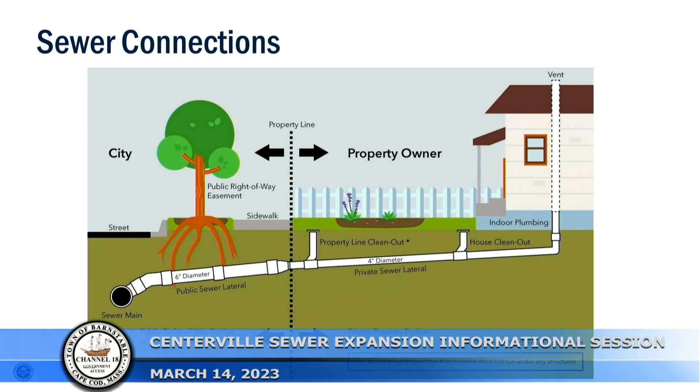As for whether we'll help find contractors, we have a list of approved contractors for this type of work on the website. There are about 30 on it, the last time I checked. That's the list you can work from. The cost varies depending on your property. If you're further from the road, down a hill, and might need a pump, that costs more than if you're about 20 to 30 feet from the road. The pipe comes out where your septic system is located in front, so you may only have about 20 feet to go with the pipe. It can vary, and I'm not going to throw out numbers, but it's in the thousands.

Greg Valenti, Centerville. Following up on this lady's questions and your answers, there probably will be some homes that need grinder pumps. Now, is that going to be an extra cost to the homeowner?

What's been done on past projects, and what we expect to happen through this program, is the town will, as part of the project, pay for the first grinder pump and effectively give it to the resident's contractor. The resident then has to pay the contractor to put it in, but they don't pay for the cost of the pump itself. Subsequent pumps and maintenance of those pumps has historically been the homeowner's responsibility.

They will probably need an electrical contractor as well, to run a new circuit to that pump. That's on the residents, of course.

Going back to the sewer on Main Street, what's the maximum depth of that trench? For the section of Main Street we're talking about, the historic village section, we're looking at 10 to 15 feet, with 15 being about the deepest, but for the most part it's about 10 feet. We're actually able to design it relatively shallow for a gravity sewer system, not 25-foot deep cuts like on Finney's Lane.